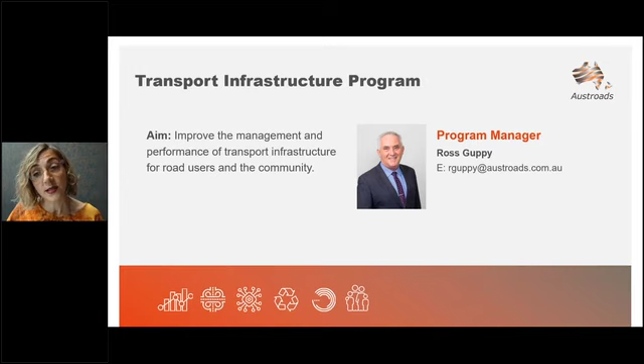A little bit about Austroads: we are the collective of Australasian transport and traffic agencies, and our focus is to support our member organizations to deliver an improved road transport network. The project that we are focusing on today was delivered under the Transport Infrastructure Program, which is managed by Ross Guppy.

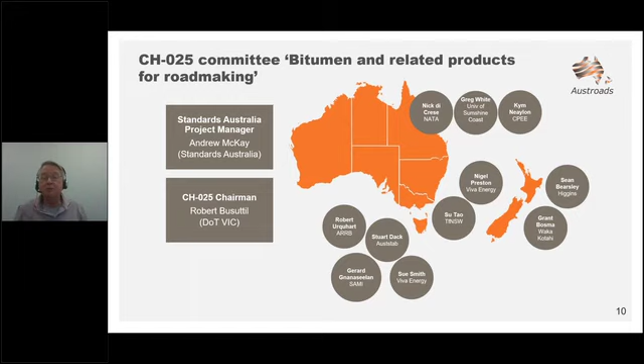In terms of the CH025 Committee, Bitumen and Related Products for Road Making, that group consists of an Australian Standards project manager, Andrew McKay, who keeps us on track and does all the paperwork for the standards, including for Standards Australia. There is a CH025 chairman, Robert Busuttil, who's on this webinar. And on the right-hand side of the slide are the members of the CH025 committee, which represents people from industry, road authorities, and also other interested parties such as CPEE and Austab.

In terms of the project background and aim, the Standards Australia CH025 committee is responsible for the revision of 4 national specifications: bitumen, cutback bitumen, bituminous emulsions, and cutter or flux oil. They're also responsible for updating the 30 test methods associated with these products.

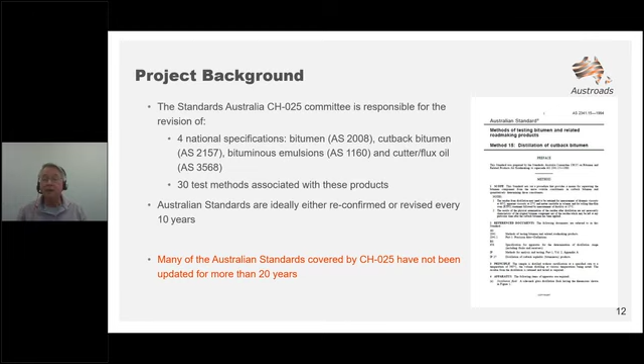In an ideal world, Australian standards would be reconfirmed, that's the committee having a look at them and saying we don't need to change anything, or revised every 10 years. That's an ideal world. Many of the Australian standards covered by CH025 have not been updated for more than 20 years. I've given an example of one, distillation of cutback bitumen, shown on the right-hand side in this webinar, which hasn't been updated since 1994.

You could say, if an Australian standard is not current, who cares? There are a number of problems with that. Some include that the specified materials or equipment can't be obtained anymore, or the standard might specify an older type of equipment where a newer type would be far better for doing the tests.

We've reviewed quite a few standards and found some test methods have things that are not best practice in terms of health and safety. One example is that a lot of the test methods say you have to use a mercury thermometer, and there's danger if you break it and mercury goes everywhere. So in the standards we've tried to keep the mercury thermometers, since some labs still use them, but also allow things like thermocouples that are safer to measure temperature.

In the worst case, if a standard's completely out of date, it might be necessary for labs to write in-house test methods to cover the deficiencies in the standards, in order for them to meet National Association of Testing Authorities, NATA, requirements.

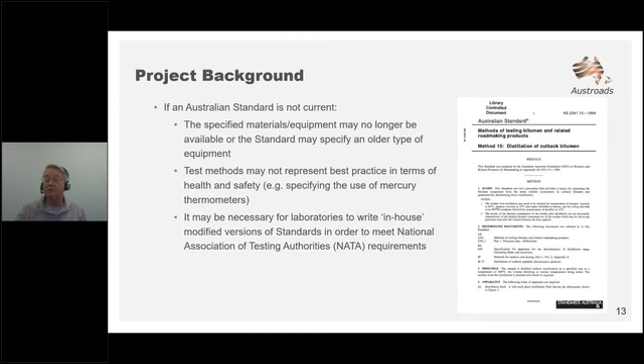I'll mainly talk about Australian standards related to emulsions and cutback bitumens in this presentation, but there are some Australian standards used to measure properties of polymer modified binders, bitumen modified with polymers, and I've given 2 examples. But most PMB-related test methods for characterizing PMBs are Austroads test methods, such as ATM 102 and AGPT 108. The specification for polymer modified binders is a national specification, Austroads technical specification ATS 3110, and I've shown the front cover of that specification on this page.

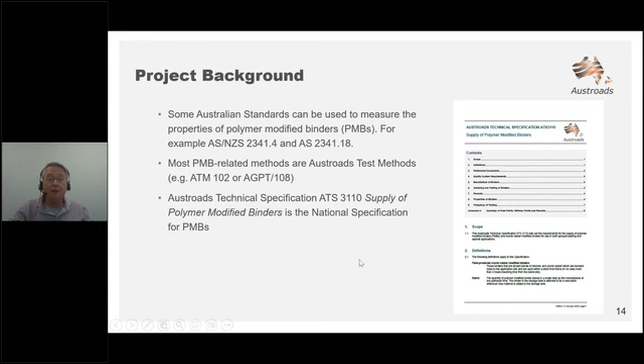The project aim was to provide independent and balanced expert technical advice during the development and review of Australian standards by the Standards Australia Committee, between August 2020 and September 2022. The other aim was to provide updates on project progress to the Austroads Bituminous Surfacings Technical Group 3 times a year during the course of this project.

This project was actually an extension to a previous Austroads project, which covered the 2 years before that. And it looks like there'll be a further project for the next 2 years to keep updating the standards.

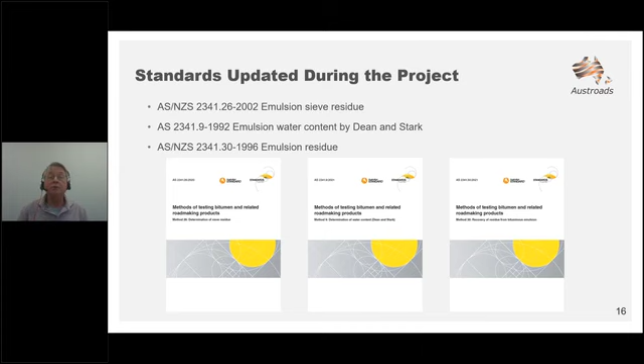In terms of the actual work done in the project, as I said before, 3 Australian standards have been revised and published. They include emulsion sieve residue, emulsion water content by Dean and Stark, and emulsion residue, and I'll talk about them later on in the webinar.

We also revised or reviewed 4 standards. The revised standards included the standard for rotational viscosity, emulsion sedimentation, and distillation of cutback bitumen. We also reviewed one standard, flashpoint of cutback bitumen, and decided it could be replaced by another test method, which I'll talk about at the very end of the webinar.

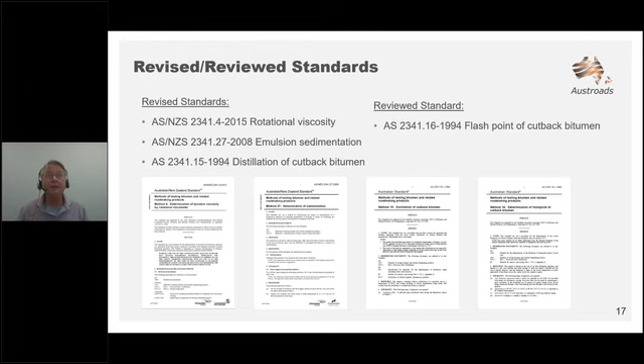That's basically the scope of the project. This Australian standards revision process is actually quite complicated, and it takes quite a while to really revise a standard, so I'll briefly go through that.

In terms of the Standards Australia revision process, the first thing that has to happen is a project proposal needs to be submitted to Standards Australia, supported by the people that use the standard. Once that proposal is accepted, the CH025 committee reviews the old document and prepares a revised draft.

Once the draft is prepared, it goes to a Standards Australia technical editor who checks it meets all the rules, and whether you should use shalls, musts, or shoulds, checking all that out. Once done, the draft is released for public comment, which takes about 2 months, and any member of the public can comment on a standard.

Once those public comments come in, the CH025 committee addresses them and changes the standard as appropriate, and the revised draft is again edited by the Standards Australia technical editor.

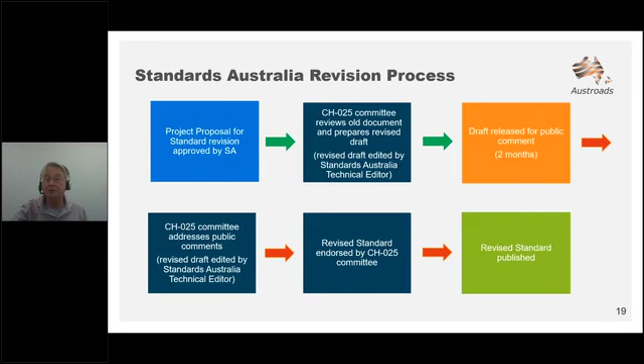Once that's done, the final draft is prepared, and there's a survey where every member of the Standards Committee has to agree to the revised version. Once that's done, the revised standard is published. So I'll now go through the 3 standards that have been published in the current project.

Then I'll talk about the ones that have been revised and the ones where we just reviewed it.

The first standard that was published and revised was emulsion sieve residue. Basically what this test measures is the amount of large broken particles in a bitumen emulsion that would particularly block pumps or sprayer jets or something like that. So this test is basically looking for relatively large lumps in emulsion.

The test involves taking an emulsion sample and passing it through a sieve of 1 or 2 different sizes. The emulsion goes through the sieve, then you wash it with a surfactant solution to get the black bitumen out, and then you wash it with water to get rid of the soap. Then it's dried in an oven. Basically what the test does is work out the percentage mass of material that doesn't pass through the sieve. If there's a lot, it'll block a pump.

The reason why you do this test is the bituminous emulsion specification, AS 1160, has maximum sieve residue limits for different emulsion grades, such as ARS, ASS, and CRS.

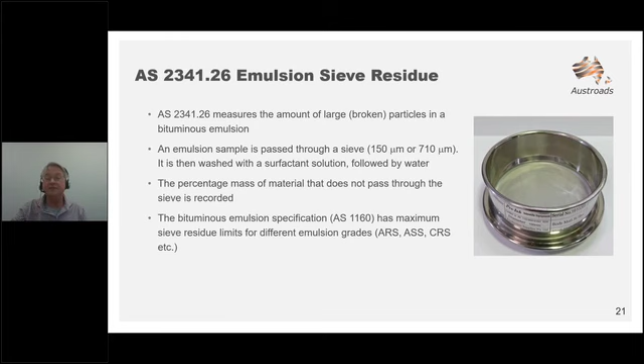In terms of changes made to this standard, when we had a look at it, we realised it's possible to get an emulsion with a very high sieve residue, say 10% or something, and you can't actually do this test because the sieve gets blocked. So we've now made the standard applicable to sieve residue results less than 1%.

In the original version of the standard, the diameters for those 2 sieves were different. We found out that most labs use the same diameter sieve, so we've changed it so that the 2 sieves have a diameter of 100 millimeters, which reflects what was used in the lab.

The amount of emulsion required by the 710 micron sieve has been reduced from 2 litres to 200 grams, just because pouring 2 litres of emulsion through a little sieve like that is very difficult.

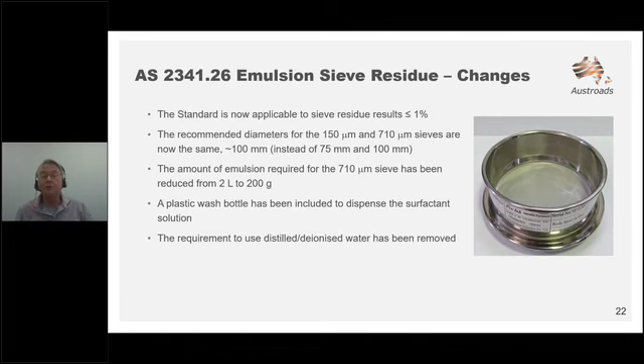Other things we've done: a plastic wash bottle has been included to dispense the surfactant solution, and the requirement to use distilled or deionized water has been removed.

Other changes to the standard to account for high binder content emulsions are that high binder contents can now be diluted with up to 50% of the surfactant solution before you put it through the sieve, to facilitate rapid flow of the emulsion through the sieve. If you've got a high binder content emulsion, it's very viscous and it's very hard to tip that through the sieve.

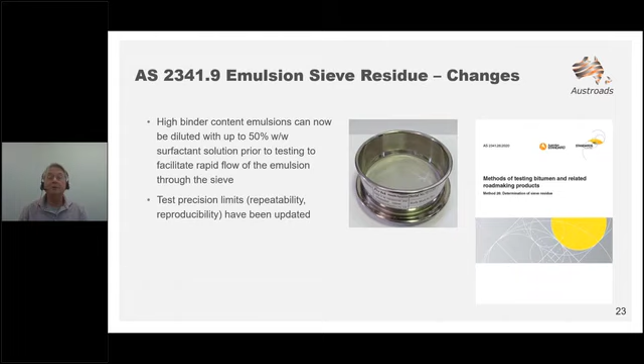The final thing that's been done for this test method is that the precision test limits, the repeatability and reproducibility, have been updated.

The second Australian standard that's been revised and published is emulsion water content Dean and Stark. This test basically measures the amount of water in a bitumen emulsion or even a refined tar. The bitumen emulsion specification has maximum water content limits for different emulsion grades.

In terms of the test, I'll put a picture of the test on the right-hand side of the slide. Basically an emulsion sample is placed in a round bottom flask and 100 ml of solvent, typically xylene, is added. The flask is then heated, and this is sort of like a distillation apparatus.

The water in the sample evaporates and then gets recondensed in the water cooled condenser on the right, on top of that picture. That water, once recondensed, goes into something called a Dean and Stark receiver, which has little lines on it that tell you the volume of water. The volume of water in the receiver is used to determine the water content of the sample.

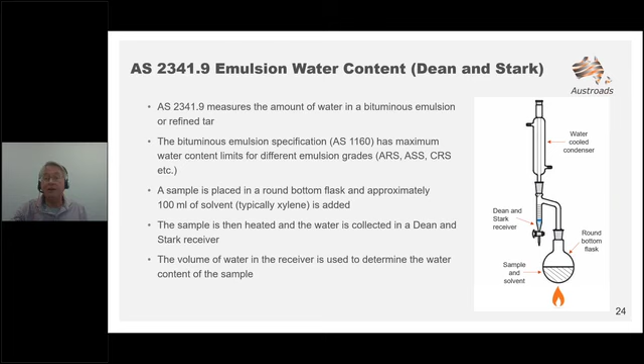Now I'll just go through some of the changes to the emulsion water content test. One of the problems with this one, and also another one of the standards I'll talk about, is that the equipment was specified and you couldn't actually get it.

The 1992 version of AS2341.9 said that the Dean and Stark apparatus, the equipment you needed to use, needed to meet the requirements of AS-R25 Dean and Stark apparatus. Now, the fact that that Australian standard has a letter in it means it's really old, like from the 1930s and 1940s. So we went to Standards Australia and asked if they had a copy of this standard in the archives, and the answer was no. So we couldn't reference that.

We had a look to see if there were other standards for Dean and Starks. There were, but we also went to some Dean and Stark manufacturers and said, do you make your equipment to a standard? All of them said no, we just make the equipment.

Based on that, the requirements of the Dean and Stark have been changed to reflect the things that will affect the test result. One of the main things is the volumes of the graduations in the receiver, so that's now specified in the standard. We've also given an indication of the approximate sizes of the round bottom flask and condenser as a sense check, so you don't use something too big or too small.

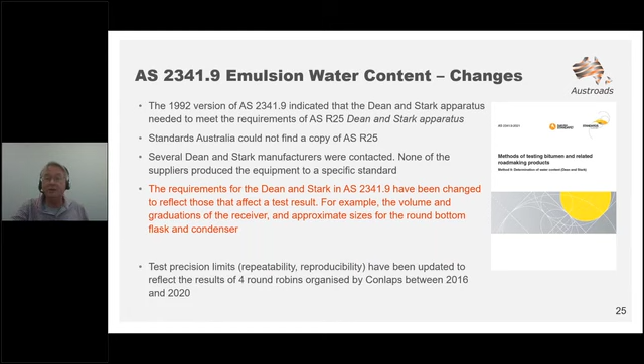The other thing that's happened with this test method is the test precision limits, the repeatability and reproducibility, have been updated to reflect the results of 4 round robins organised by Conlaps between 2016 and 2020. On the right-hand side is a picture of the published standard, the front cover.

AS 1160, the emulsion specification, says do this test to get the bitumen out of the emulsion, then subject it to viscosity at 60 and toluene insolubles tests. AS 1160 also recommends that evaporation residue tests be performed on CAM grade emulsions, which contain a high level of solvent, typically diesel. These emulsions are normally used in cold mix applications using AS 2341.30. This is different from the other emulsion grades where evaporation tests are done using AS NZS 2341.23.

The test AS NZS 2341.23 basically involves placing an emulsion sample in a metal container, normally a metal tin, and heating it to boil off all the water and the kerosene.

This emulsion residue test is a bit more complex than that. The 2341.30 tests are done under an inert atmosphere to stop the bituminous emulsion component oxidizing. These tests also involve repeated sample heating so you can get as much solvent out as possible, which is probably one of the reasons the emulsion specification recommends these tests on CAM grade emulsions, which contain a high level of solvent.

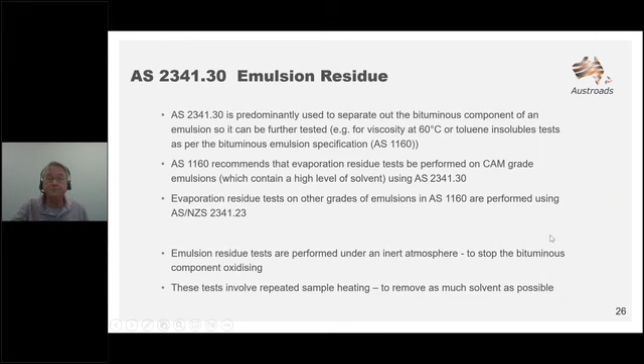The emulsion is heated on a hot plate under that inert atmosphere until its temperature is about 130. The sample is then cooled to about 50, and the sample is measured, and the process is repeated until the loss in mass between successive evaporations is less than 0.2 gram.

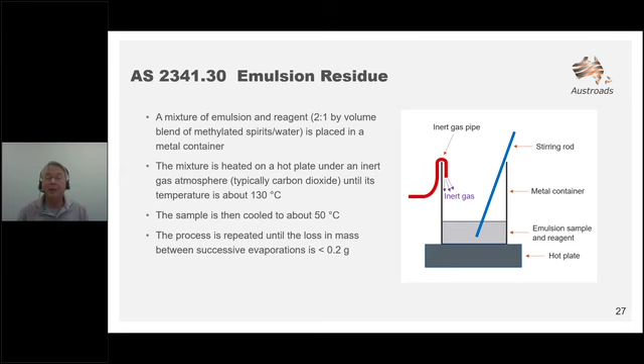In terms of changes to the emulsion residue test, the system used to deliver the inert gas was a bit undefined in the original version of the method, and the grade of methylated spirits was also undefined. So we've tightened those things up. The grade of methylated spirits now says commercial grade methylated spirits, because we wanted to say methylated spirits from Bunnings, but we weren't allowed to - the technical editor didn't let us.

One of the safety improvements in this method is that the 1996 version asked for the emulsion reagent mixture to be stirred with a thermometer. That's a bit dangerous if you're stirring with a thermometer that has mercury in it, and the mercury comes out when it breaks and is heated - that's not good. So we've replaced the thermometer stirrer with a separate stirring rod and an infrared thermometer to measure the temperature for safety reasons.

Because the evaporation residue result is only required in the emulsion specification for CAM emulsions, the calculation of evaporation residue test results is now optional.

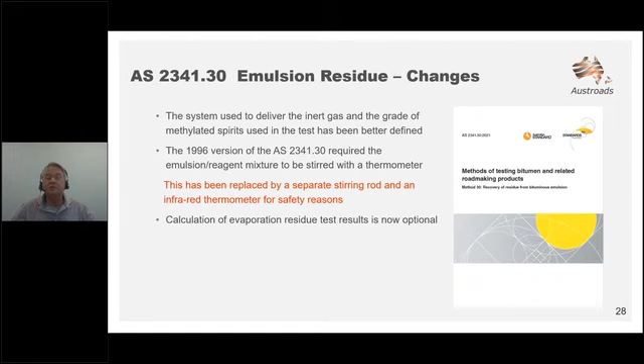So those are the standards that have been revised and published. I'll go through the 3 standards under revision and the final standard which the committee reviewed. The first standard reviewed by the committee was rotational viscosity.

This test is actually used for quite a number of bituminous materials, including bitumen, PMBs, and emulsions. There are specified temperatures in the relevant specifications that each of these binders need to be tested for rotational viscosity.

The basic principle of the test is a sample is placed in a temperature controlled chamber, which I've tried to draw on the right hand side of the slide. The black is the sample, and a rotating spindle is placed in the sample, and the force required to rotate that spindle at a certain speed is related to the viscosity of the sample.

Taking that force, the viscosity of the sample is calculated using the force, the geometry of the chamber and spindle, and the rotational speed used during the test, i.e. the RPM that the spindle's rotating at.

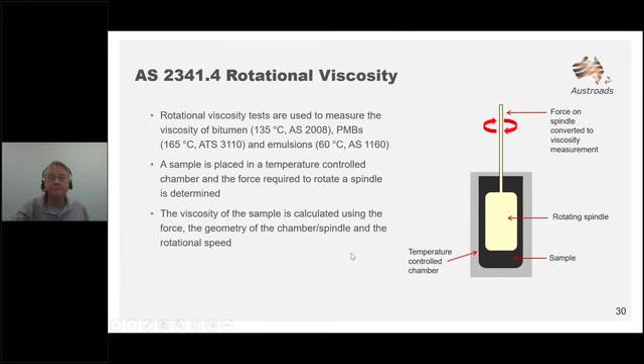Now, this standard was originally revised so that viscosity at 25 degrees tests on emulsions could be tested using a rotational viscometer instead of an Engler viscometer. We're trying to modernize these, because an Engler viscometer is a brass container with a hole in the bottom, and you put a stick in to block it, then pull the stick out and measure the time it takes to fill a volumetric flask.

This test is a bit more advanced than that, and you don't need a stick to do it. Even though this was the initial idea of revising this standard, several additional issues were identified with the 2015 version of the test, which only allowed an L series Brookfield viscometer to be used to test binders. What we found was that several laboratories had L series and several had R series, which are a little less accurate than the L series.

Since the last revision of this test in 2015, a number of NATA audit issues have been picked up by labs, associated with the validation of the temperature control chamber. You need to do a validation process to make sure the temperature is right, and the calibration oil viscosity validation, where you check that the instrument is giving the proper viscosity by using a calibration oil of known viscosity. Several labs have been picked up by NATA because of the wording in the test.

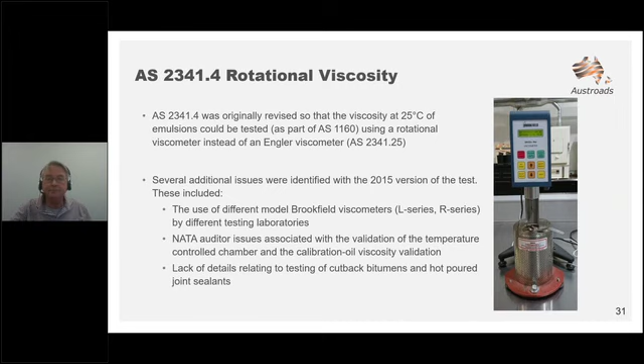So in terms of changes to this test, if you look on the right-hand side, this is a picture of a Brookfield viscometer that you typically do the test with. A procedure to test emulsion samples at 25 degrees has been included in the standard.

Other changes we've made is that the Brookfield viscometer model that can be used to test different bituminous products has been specified. Bitumen and bituminous emulsions and cutback bitumen samples need to be tested with an L series Brookfield viscometer because this one's more sensitive than the R series. And at the current time, PMBs and hot poured joint sealants can be tested using either an L or an R series Brookfield viscometer.

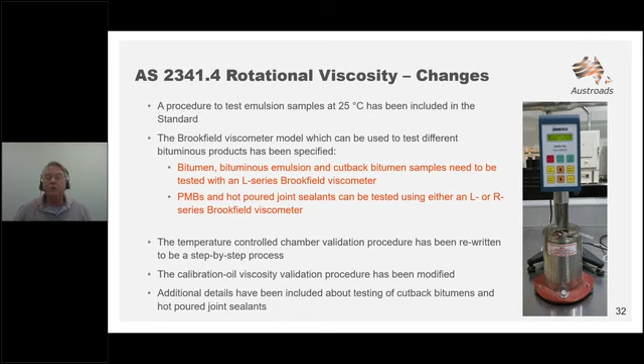Other changes we've made is that the temperature control chamber validation procedure has been rewritten to be a step-by-step process, as some of the NATA auditors got a bit confused about the intention of that section in the old method. The calibration oil viscosity validation has been modified to be clearer, and additional details have been included about testing cutback bitumens and hot poured joint sealants.

In terms of the status of this standard, a revised version of AS 2341.4 was released by Standards Australia for public comment between June and August this year. Currently we have 5 public comments, and they will be addressed by the CH025 committee prior to publication of the standard. We're hoping to have a meeting in the next month or so.

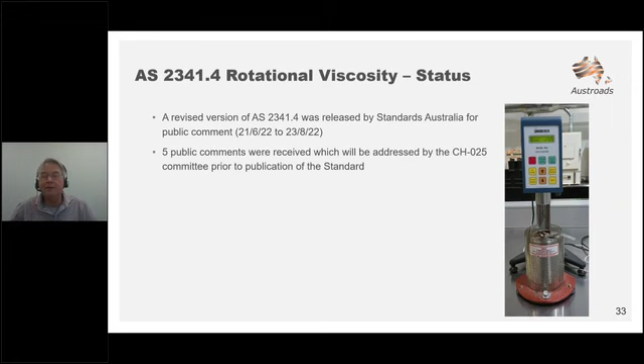The second test that's been revised in this project and has not yet been published is emulsion sedimentation. This test investigates whether an emulsion will separate or break when stored for an extended period. Basically, the test involves taking a 500 ml measuring cylinder - I've got a picture on the side where it's got some taps. You don't have to have taps, I'll go into that later.

So you put 500 mils of emulsion in the measuring cylinder, then let it stand for 3 days at room temperature. In the current test, after it's stood there for 3 days, the water content is determined on the top and bottom 50 mils of the 500 mil sample so that a sedimentation result can be calculated. Basically, the premise is that if the bitumen sinks to the bottom, there'll be more water in that top 50 mils than in the bottom 50 mils.

The bitumen emulsion specification has maximum specification limits for different grades, and that's one of the reasons why we were changing this test.

The original scope of revising this test method was that sedimentation tests could be calculated using evaporation residue test results using AS/NZS 2341.23, rather than Dean and Stark water content results, which I talked about a bit earlier in the webinar.

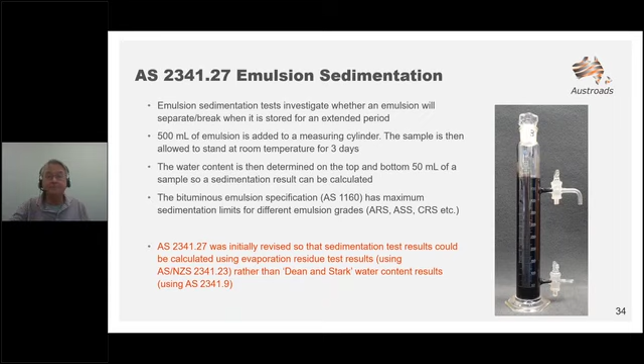Whether you measure the change in bitumen content when the emulsion sediments, or the water content, you're pretty much going to get the same answer both ways. So that change has been made to the standard.

We've also made other changes to the emulsion sedimentation test. In terms of the glass measuring cylinders included, it was quite vague what sort of glass measuring cylinders you could use. It also specified that the glass measuring cylinders had to have glass tops, taps and stoppers. Now, it doesn't actually matter if those stoppers and taps are made out of plastic, so we've included that glass measuring cylinders with plastic stoppers or taps are now allowed in the method.

As I mentioned before, the standard also allows you to not use a measuring cylinder like the one illustrated on the right-hand side up top. It also allows you to use measuring cylinders without taps.

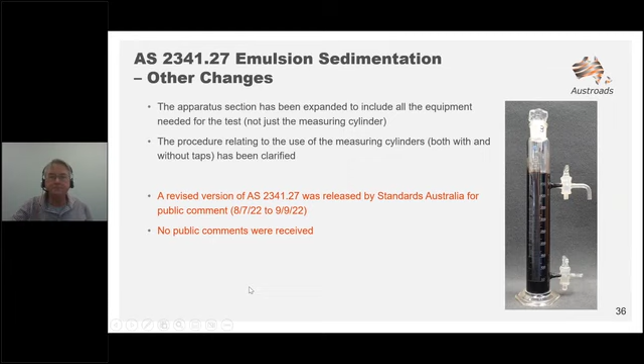The last standard updated in this project is AS 2341.15, cutback distillation. This test is used to determine the bitumen content of a cutback bitumen. The cutback bitumen specification, which I'll show an excerpt of in the picture below, contains 8 cutback bitumen grades, ranging from AMC 00 to AMC 7.

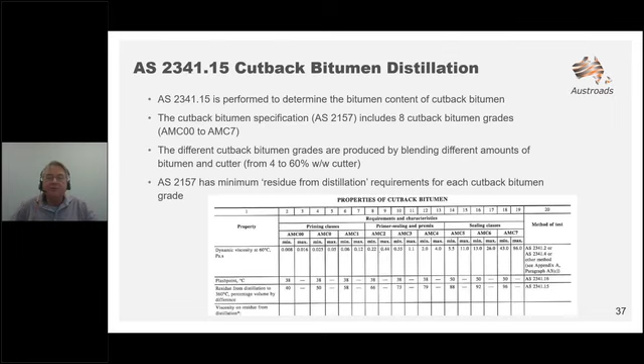The essential difference between these cutback grades is the amount of bitumen and the amount of cutter in each. AMC 00 has the most cutter, and AMC 7 has the least. The cutback bitumen specification has minimum residue from distillation requirements for each grade, and if you look closely you can see the limits in the picture at the bottom of the slide.

This test involves placing a 200 mil cutback bitumen sample in a distillation flask and heating it to 360 degrees. If you look at the pictures, that's the distillation flask with a thermometer, which is then placed in a special metal shield.

The distillation flask, with the thermometer sticking out the top, is connected to a distillation apparatus and a distillate receiver. Basically, the test works by heating the sample with a gas burner. The cutter in the cutback bitumen evaporates, passes through the water-cooled condenser, returns to liquid form, and is collected in the distillate receiver, which is a measuring cylinder so you can measure how much distillate comes out.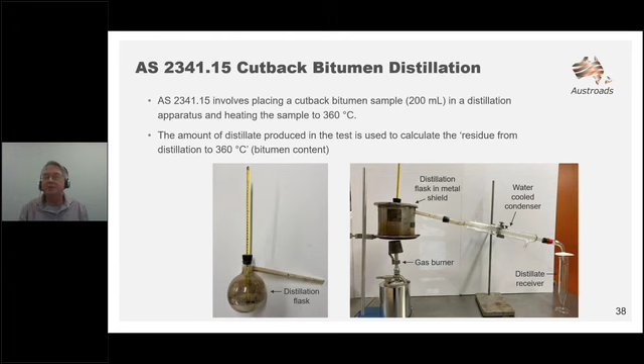The amount of distillate produced in the test is used to calculate the residue from distillation to 360, which is the bitumen content.

This was another test method where you couldn't actually get the equipment to do the test. I've given an example of what's specified in the test method regarding the size of the distillation equipment—it was very specified, and the shield was also very specified. But this is a distillation, so it doesn't actually matter if the size of the components is different; what actually matters is the temperature.

What we did during revision of this standard - there are 2 labs that are NATA accredited for the test, and they both indicated they couldn't meet the equipment size requirements of the old method, even when the equipment was made by a specialist glassblower in a university department.

What we've done as a result of this is the equipment size requirements have been relaxed in the revised version of AS 2341.15. As I said, it's a distillation. It doesn't matter if the condenser is 200 mils or 250 mils, it's still going to work. So we've basically relaxed the equipment requirements.

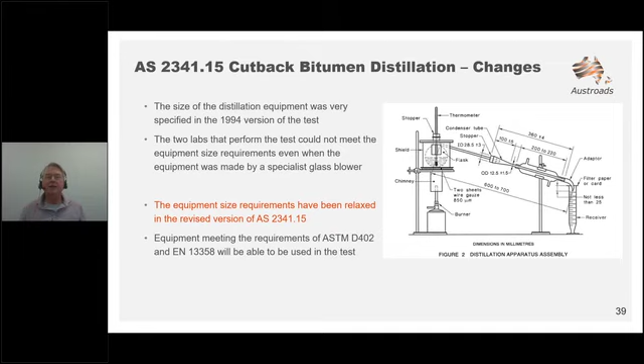We've done that in a way - there's a number of overseas cutback bitumen distillation methods, ASTM D402 and EN 13358, which do have equipment requirements, and it does look like you can purchase equipment meeting those requirements from overseas. So we've made the equipment size requirements in AS 2341.15 such that you could use an overseas set of equipment for cutback distillation.

Another change that we've made to this standard was that the 1994 version required that you basically do the distillation, and at the current time you do the distillation and measure the amount of distillate at 360. The older version of the standard wanted you to do that at a variety of different temperatures.

The reason for that was that in the 1997 version of the cutback distillation bitumen specification, those volumes at different temperatures were specified. As that requirement hasn't been in the specification since 1997, we've removed the requirement in this test to determine distillation volumes at temperatures lower than 360.

We've also made several changes to this standard for safety reasons. The new version of the standard allows samples to be heated using either a gas burner or an electric heating mantle. We've done that because a gas burner is a flame and you've got a flammable material. A thermometric device such as a thermocouple can be used instead of a thermometer.

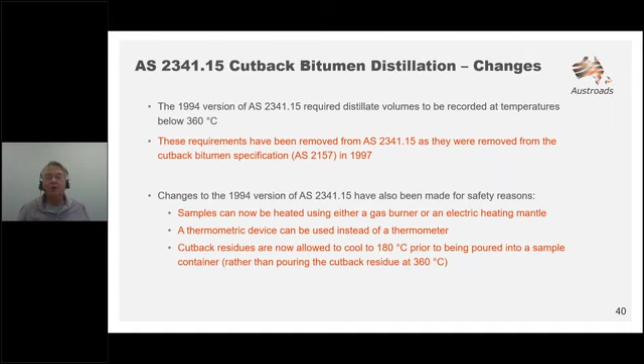One of the nuances of this test was it basically said, do the test, heat the sample up to 360 degrees, and then take it apart and pour out the bitumen. Now, there's a definite risk of what's called auto ignition, which basically means the whole thing catches on fire if you do that. So we've reviewed the European version of this standard, and they allow cutback residues to cool to 180 degrees before you take the whole equipment apart and then pick it up and pour it into a tin. So you can now do that cooling step rather than have the risk of it catching fire.

You go into the section that says public comment. You have to register with Standards Australia with a username and password, but once you've done that, you can go in and see the draft version of the standard, and you can put some comments in, which will be looked at by the committee. The consultation for this Australian standard closes on the 20th of October 2022.

The final standard that I'll talk about is one that's been reviewed by the Standards Australia Committee - cutback bitumen flashpoint. These tests are done to basically look at the flammability of a bituminous binder.

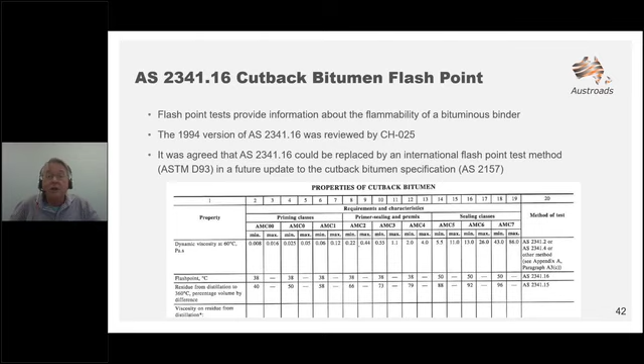We reviewed this standard, and the take-home message is we agreed that this standard, which is very particular to Australia, could be replaced by an international flashpoint method, ASTM D93, in a future update to the cutback bitumen specification.

One of the reasons that we decided that ASTM D93 seems appropriate is that in the dangerous goods code for flammable materials, ASTM D93 is included as one of the tests that you can conduct flashpoint tests on flammable materials, but AS2341.16 isn't included in the tests allowed in the dangerous goods code.

So finally, I'll just give a summary of where all the standards are at. As discussed in the webinar, as a result of this project, 3 Australian standards - emulsion sieve residue, emulsion water content, and emulsion residue - have been revised and published by Standards Australia.

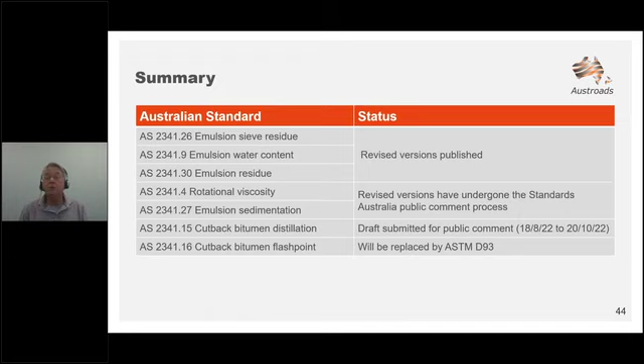2 have currently undergone the Standards Australia public comment process, that's rotational viscosity and emulsion sedimentation. In terms of cutback bitumen distillation, a draft has been submitted for public comment, which closes on the 20th of October 2022. And for cutback bitumen flashpoint, the committee has decided it will be replaced by ASTM D93.